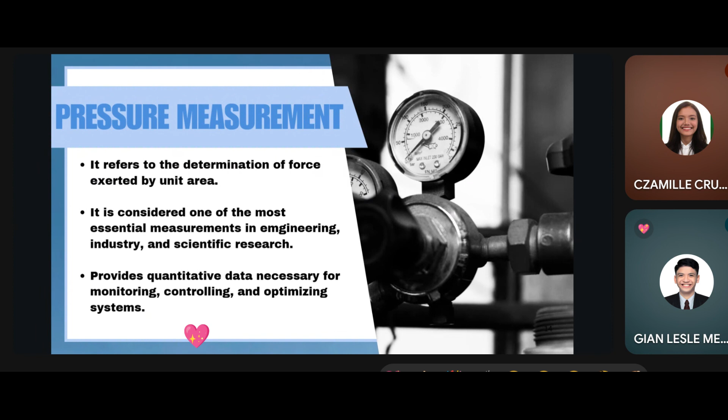So today we're going to talk about pressure measurement. Pressure measurement is one of the most important and widely used measurements in both engineering and everyday applications. It refers to determining the amount of force of a fluid, whether it is a liquid or gas. Just like temperature and flow rate, pressure is a fundamental parameter that must be monitored to ensure safe and efficient operation of systems. By understanding pressure measurement, we can prevent accidents, improve efficiency, and ensure the quality of products and services. That's why it is considered one of the most common and valuable measurements used across the world.

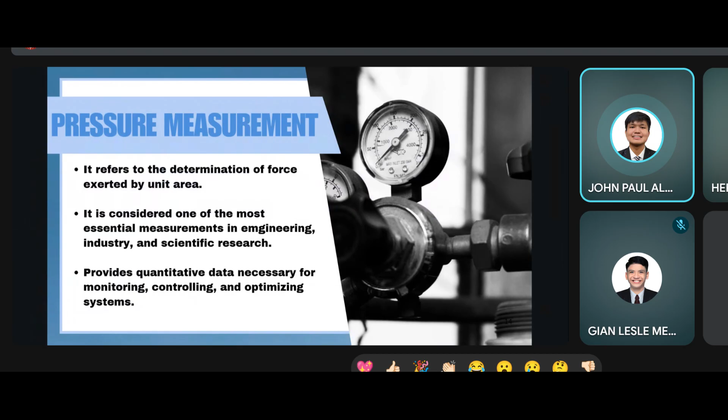Next, we have the core applications of pressure measurement.

We have boiler monitoring, industrial processes, liquid level detection, density estimation, flow rate indication, temperature indication, and everyday application.

Sa boiler monitoring po, pressure measurement ensures boilers operate safely by keeping steam pressure within safe limits. Sa process industries po, continuous pressure monitoring maintains product quality and safety. Sa liquid level detection, pressure readings determine liquid levels in tanks and vessels to prevent overflow or shortage.

Sa density estimation naman po, pressure data can be used to calculate the density of fluids for quality control. Sa flow rate indication, devices like Venturi meters po determine the difference to measure fluid flow. Sa temperature indication naman po, kagaya po ng thermometers, nagre-rely po ito to indicate the temperature.

Sa everyday application naman po, pressure measurement is used daily, kagaya po sa ating mga bahay, sa rice cooker, sa tires, at pati na rin po, ginagamit po ito sa medical equipment for safety.

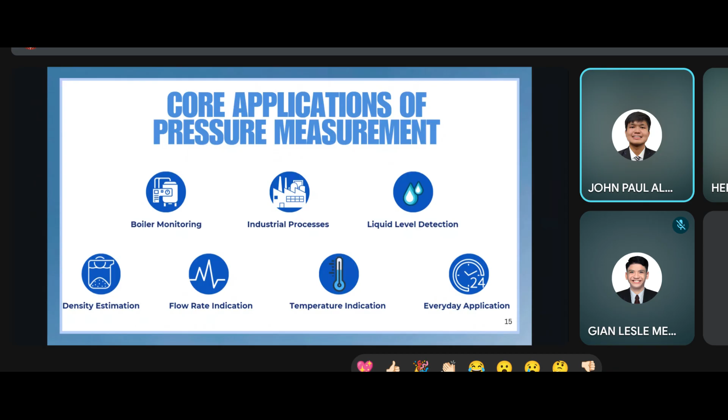Now moving on to the importance of pressure measurement in industrial processes. Pressure monitoring is critical in process industries for several key reasons. The first one is safety. Accurate pressure readings help prevent dangerous pressurization, which could lead to equipment damage, explosions, or the release of harmful substances. Maintaining proper pressure level is essential for protecting both personnel and equipment.

Next one is process control. Pressure is a fundamental variable in many industrial operations. Reliable pressure data allows for precise control of processes such as chemical reactions, fluid transport, and gas compression, ensuring consistent product quality.

The next one is operational efficiency. Managing pressure effectively can improve energy efficiency and reduce waste. For example, maintaining optimal steam pressure in a system can lower energy consumption and operating costs while minimizing environmental impact.

The next one is equipment longevity. Continuous pressure monitoring helps safeguard sensitive machinery like pumps, compressors, and pressure vessels from damage caused by abnormal pressure conditions. This extends equipment life and reduces maintenance expenses.

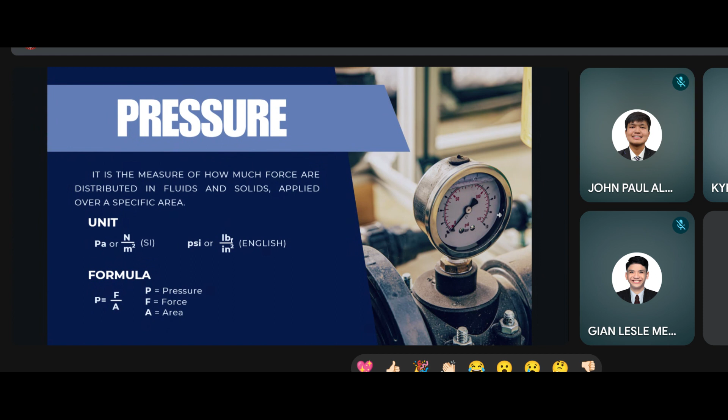So allow me to discuss the type of pressure measurement. So again, sabi nga po ni Engineer Ercilias, pressure is described as the amount of force applied to the surface of an object per unit area. So ang formula nga po din ng pressure is force over area. So pressure measurement is, in principle, always comparing the pressure between two different places.

So siya yung nagiging reference ng mga pressure. So absolute pressure, siya naman yung pwede pong babalikan. Absolute pressure, so yung pressure above the absolute zero. At saka atmospheric, yung pressure ng surroundings at sea level, which is 101.325 kPa. Then vacuum pressure, siya naman yung pressure below atmospheric. At gauge pressure is above atmospheric. At pressure differential naman is the pressure difference in between 2 points.

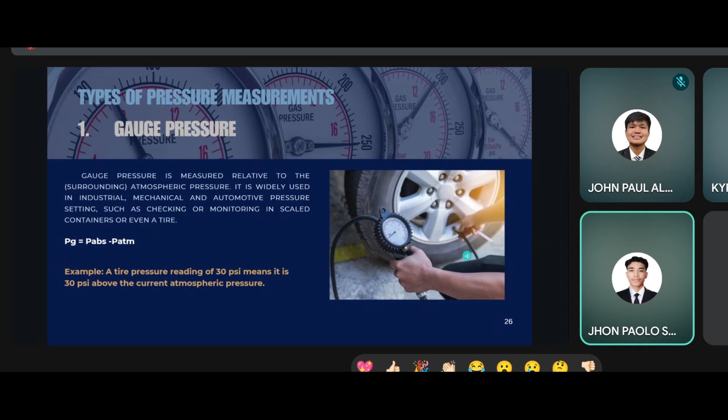So next, we have absolute pressure. This is the pressure measurement in relation to a perfect vacuum, which serves as the zero reference. This point has been chosen because it is the lowest possible pressure. In particular, there is no pressure at all.

As I said, wala sa absolute zero, wala nang pressure. So the pressure above the absolute zero is always positive.

For example, a tire pressure reading of 30 psi means it is 30 psi above the current atmospheric pressure of the surrounding. Hence, it's about 44.7 psi or 308.1107 kPa on the absolute scale.

We got that by adding the atmospheric pressure of the surrounding, which is 14.7 psi or 101.325 kPa, plus the pressure felt by the system, how strong the pressure is inside it, which makes the 30 psi. So we just add the atmospheric pressure to the gauge pressure.

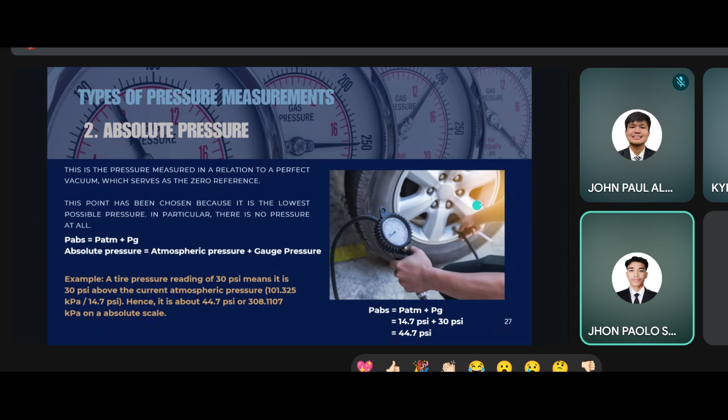So next is differential pressure. Differential pressure is also referred to as pressure difference. This type measures the pressure difference between two points or two random locations within a system.

So why is it important to monitor the pressure difference? Because it serves as a detection method for pressure drops or pressure increases in a component.

For example, the differential pressure value provides information about the difference between the pressure at the inlet and the pressure at the outlet of the tool. It can be a heat exchanger, pump, or filter.

So in differential pressure or pressure difference, you can have a positive or negative value. If the pressure difference is negative, we can speak of pressure loss. If it's positive, that's a pressure increase.

So when there is a pressure drop, that's a possible warning. The possible reason may be a leak, hole, or break in the system. When there is a pressure increase, it may indicate that there is additional resistance in the system, possibly a blockage or debris that built up over time.

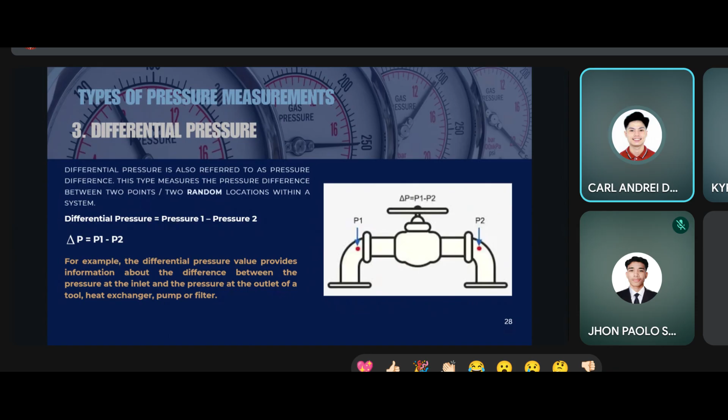And for the remaining types of pressure, we have atmospheric pressure. I believe this isn't new to us since we've long used it in solving pressure-related problems. Basically, this is the pressure exerted by the Earth's atmosphere.

Where is it used? It's most prominent in different types of barometers and also in aircraft flight and lift pumps. Additionally, the most common value used for atmospheric pressure at sea level is 101.325 kilopascal.

Now, let's move on to vacuum pressure. Here, what you need to remember is that any pressure under atmospheric pressure, or with a negative sign, is considered vacuum pressure. It is also expressed as a negative gauge pressure.

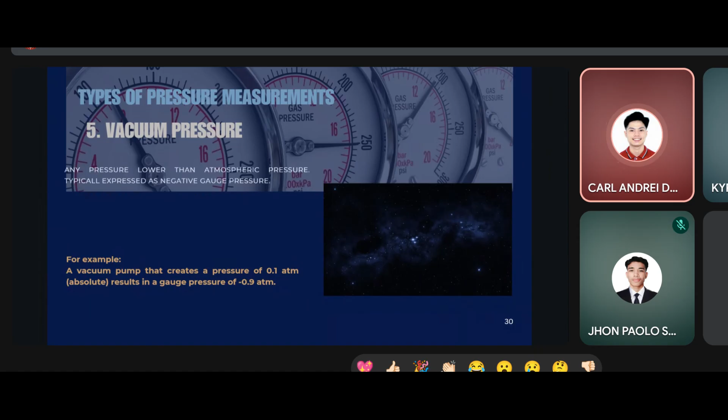And last but not the least, the hydrostatic pressure.

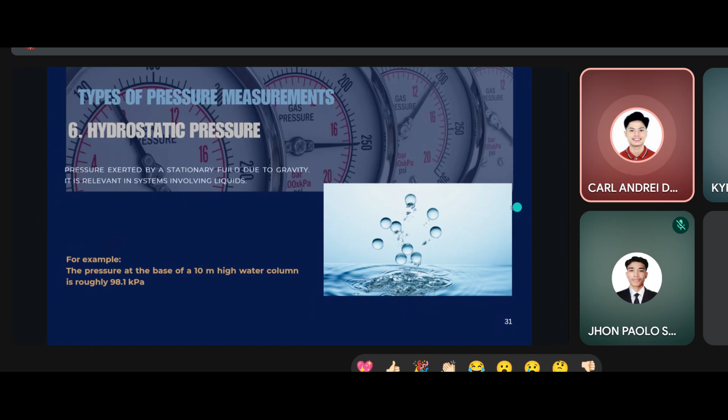Ang una dito ay Pascal. Kung matatandaan niyo naman siya ay si Blaise Pascal na na-discover ng Pascal unit sa pamamagitan ng study of fluids. Base nga sa formula kanina, our pressure is equals to Newton per square meters. Application niya is meteorology, mechanical engineering, syempre sa atin, civil engineering, and technology and electronics. So example niya na makikita natin minsan sa mga sample problem is the vacuum cleaner has a suction power of 25,000 pascals or PA. The pressure in a hydraulic line is 120,000 PA pascals.

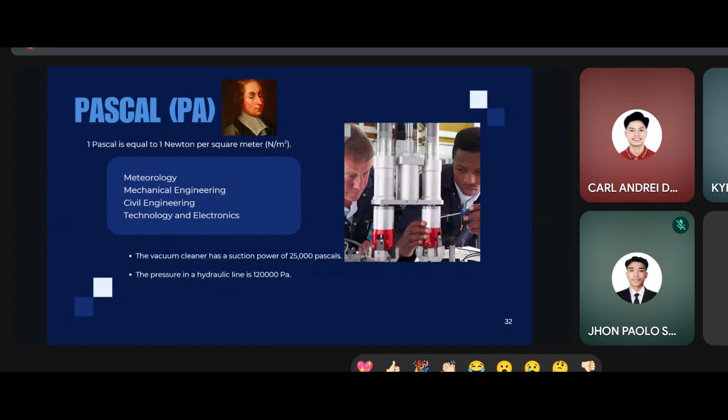Next, kilopascal. Kagaya ng Pascal, syempre, dagdagan lang siya ng kilo. Paano ba natin ginagawang kilopascal ang Pascal? Kung may given tayo na Pascal, dinidivide lang natin siya sa 1,000. Conversion natin, kung may given kayong 12,000 Pascal, multiply nyo lang siya sa kung anong gusto nyong gawing unit. Since gagawin natin siyang kilopascal, 12,000 Pascal times 1 kPa over 1,000 PA.

Ang application niya naman is meteorology, tire pressure, automotive, and fluid dynamics. Since Pascal siya, wide ang kanyang application. Standard atmospheric pressure at sea level is approximately 101.3 kilopascals or kPa. The air compressor operates within a range of 413 to 758 kilopascals.

Tapos ito na ang last na sa conversion, ang megapascal. Since ang pascal natin ay pwedeng lumaki ng value. Like sa thermodynamics, kung mapapansin nyo nung nag-thermo 2 tayo, ang madalas na given sa atin ay MPa kasi ang ating pressure measurements ay palaki nang palaki. Definition dito is 1 megapascal is equals to 1 million pascals. It is common in hydraulic systems and high pressure applications. Para naman ma-convert ang ating PA sa MPa, dinidivide lang natin yung ating pascal sa 1 million para makuha ang ating MPa.

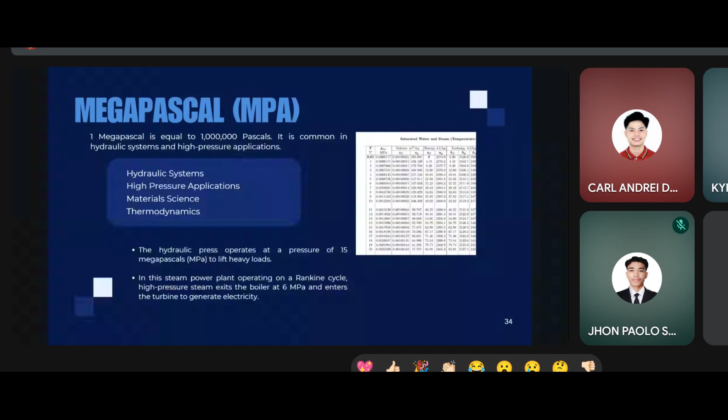Kung meron tayong SI units, hindi naman papatalo dyan ang mga taga-US na may sarili nilang pressure measurement gaya ng pound per square inch, na minsan ay nakapagpahirap sa atin sa pagsasolve. Definition niya is the pressure resulting from a force of 1 pound force applied to an area of 1 square inch, widely used in the United States kasi nga English unit siya. Application niya is tire pressure, hydraulic system, and other industrial applications. Pwedeng ang maging unit nito ay yung LB over inch squared.

Example: the bike tires were inflated to 40 psi. The water pressure at the bottom of the tank is measured to be 45 psi.

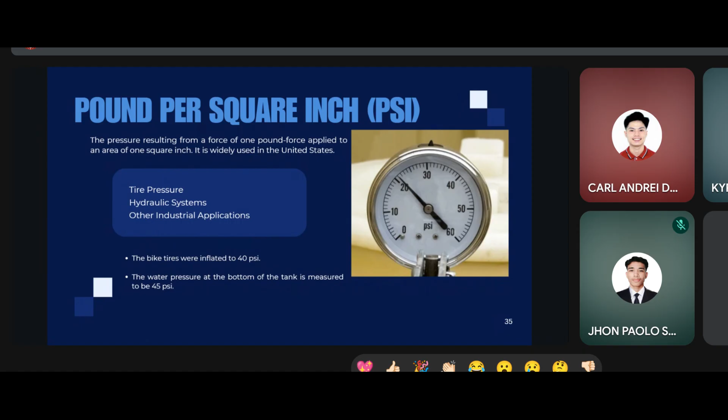Ang pwede naman niyang isa pang unit ay pound per square foot, which is the pressure resulting from a force of 1 pound force applied to an area of 1 square foot, used in structural engineering and wind pressure measurement. Application niya rin ay geotechnical engineering and HVAC systems. Pwede din natin siyang gawing LB over feet squared.

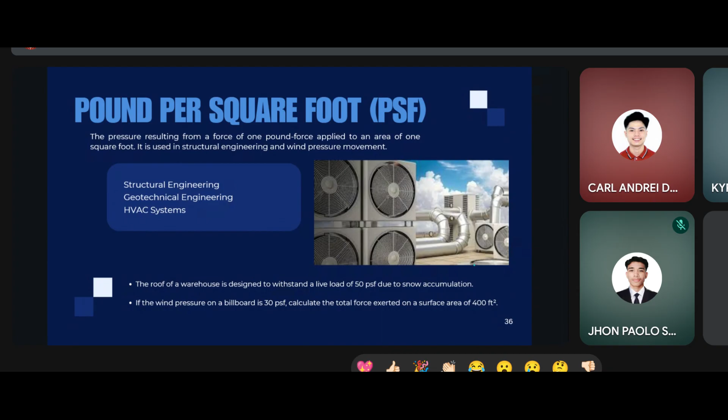The roof of a warehouse is designed to withstand a live load of 50 psf due to snow accumulation. If the wind pressure on a billboard is 30 psf, calculate the total force exerted on a surface area of 400 square feet.

Ito na ang isa pang measurement ng pressure, ang bar. 1 bar is equals to 100,000 pascals, pwede rin siyang 0.1 MPa. The bar is a metric unit of pressure but not part of the SI system, though it is accepted for use. Introduced by Vilhelm Bjerknes, a Norwegian meteorologist, to simplify atmospheric pressure measurements. Siya ay applied sa meteorology, oceanography, automotive application, pressure vessels, and hydraulics and pneumatics.

The pressure inside the container is 5 bar greater than the atmospheric pressure. The hydraulic system operates at a pressure of 120 bar. So yung mga sunod pa pong unit ay i-explain ni Gian.

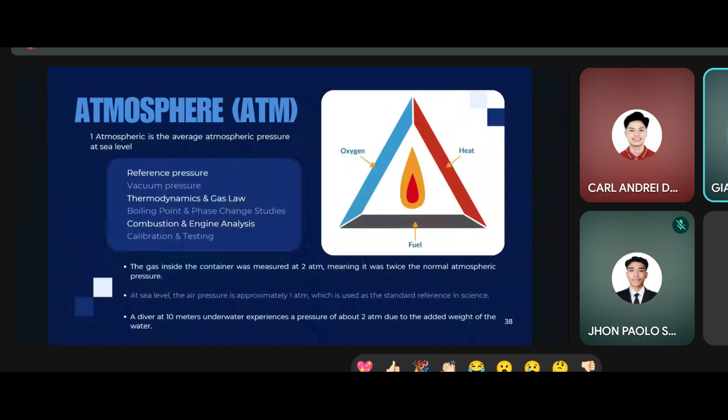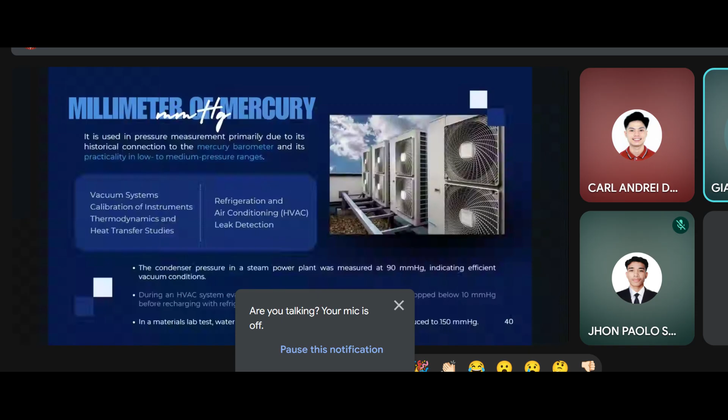Ang siguro hindi tayo medyo familiar, yung refrigeration and air conditioning o yung HVAC. Kasi yun nga, parang prerequisite pa siya. So sa HVAC ay yung mga vacuum levels na ating ginagamit, na gagamitan din natin ng mmHg. And ang mga uses niya ay yung mga examples din sa baba. Nag-originate ang mmHg ay dahil sa mercury barometer at saka practicality in low to medium pressure ranges.

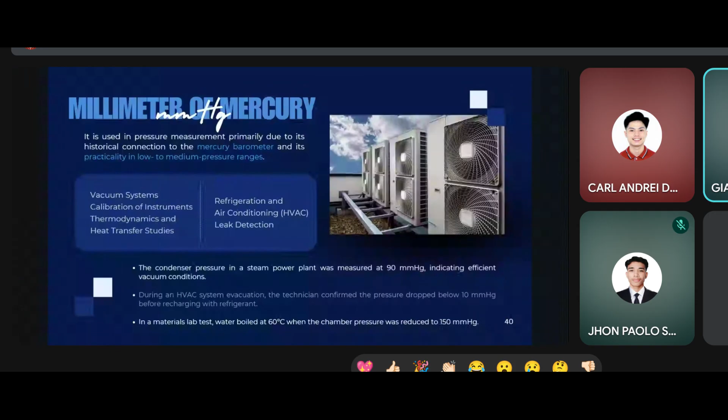And lastly, sa ating unit ng pressure measurement ay ang mbar or millibar. Na-emphasis din sa libro na siya ay used in meteorologies, kasi ang mbar ay invented noong early 20th century by a meteorologist. Kaya siguro yun yung na-emphasis din sa libro natin. And siya ay magagamit din sa mga vacuum technology, refrigeration, turbomachinery, leak testing, and environmental engineering.

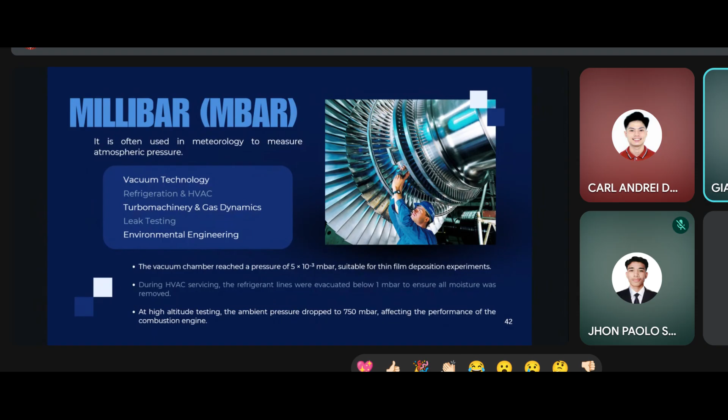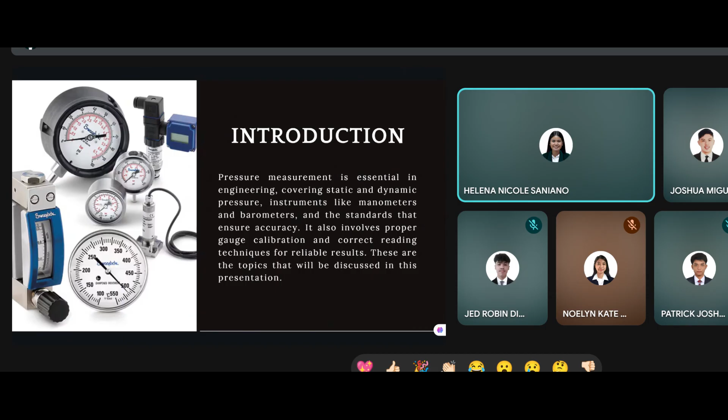Now we're going to discuss static and dynamic pressure. Static pressure is uniform in all directions, so pressure measurements are independent of direction in an immovable static fluid. It doesn't consider the movement in the pressure. Dynamic pressure, with flow taken into consideration, applies additional pressure on surfaces perpendicular to the flow direction while having little impact on surfaces parallel to the flow direction.

We all know static means not moving, while dynamic means it's moving, considering the movement of gases or fluid. Then there's total pressure or stagnation pressure: an instrument facing the flow direction measures the sum of static and dynamic pressures. Since dynamic pressure is referenced to static pressure, it is neither gauge nor absolute — it is a differential pressure.

Now let's proceed to the pressure measuring instruments. The first one is the manometer. A manometer is a device used to measure pressure, typically of gases or liquids, by balancing the pressure against a column of liquid. Manometers are simple, reliable, and widely used in various applications. It is a simple, classic instrument used to measure the pressure of gas or liquid. It works by comparing the pressure of the liquid to a reference pressure, usually having a glass tube inside containing liquid. When there's a pressure difference, the liquid column moves up or down.

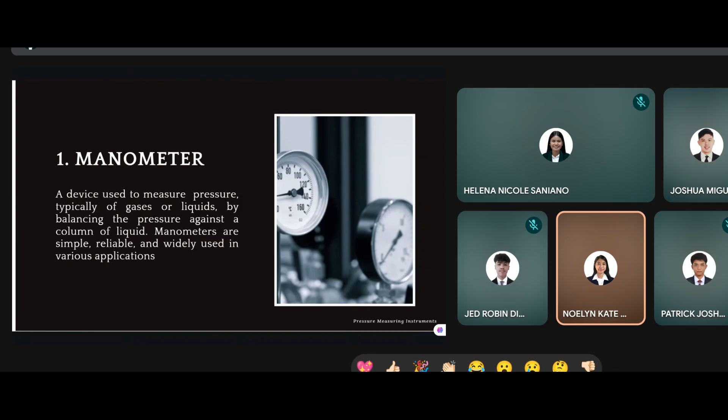Here is the common equation we encountered in thermodynamics and fluid mechanics: P equals rho GH, where P is the differential pressure, P1 is the low pressure, P2 is the high pressure, rho is the density, G is the acceleration due to gravity, and H is the height.

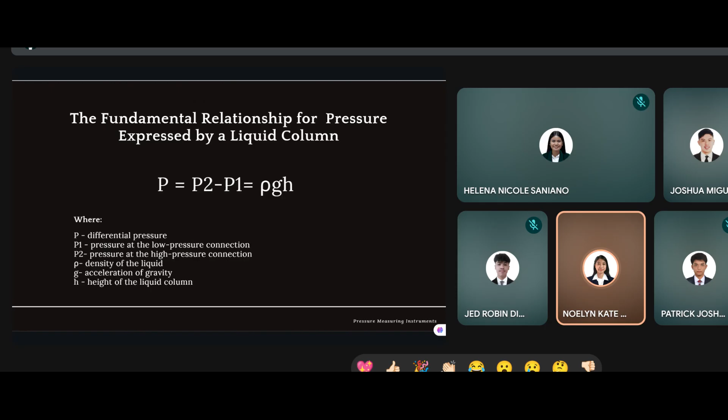We have different types of manometers. First is the U-tube manometer, consisting of a U-tube glass filled with liquid, usually mercury or water. It is used to measure small pressure differences such as in laboratory experiments or ventilation. The U-tube manometer is basically a glass tube shaped like the letter U with liquid inside. One side is connected to the pressure source, while the other side is open to the atmosphere or reference. When there's a pressure difference, the liquid level becomes uneven on the two sides, and that's the basis for reading. It's easy to use for small pressure differences like lab experiments or ventilation systems.

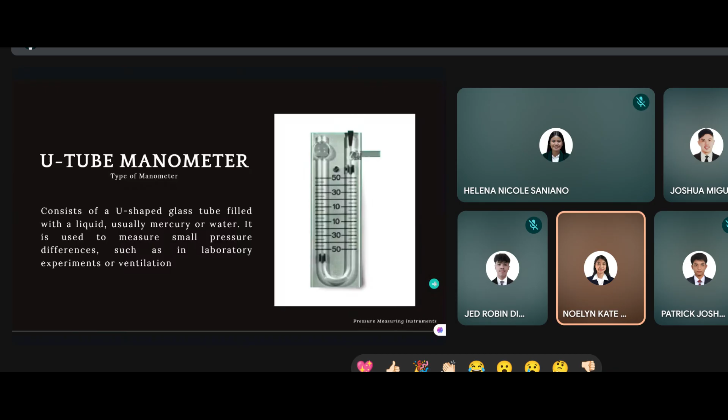Next is the inclined manometer, a specialized type designed to measure small pressure differences with greater accuracy and sensitivity than standard U-tube manometers. It has almost the same concept as the U-tube, but the tube is tilted. Because it's inclined, the movement of the liquid column is longer for the same pressure change, making it more sensitive and accurate for very small pressure differences. The formula used involves the angle, since it's tilted — we use rho GH times sin theta.

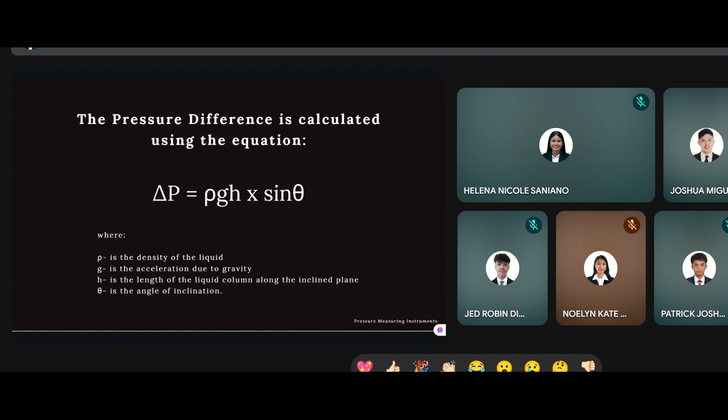Another type of manometer is the well-type manometer. It is a variant of the traditional U-tube manometer, designed to measure pressure with enhanced readability and convenience, especially for larger pressure ranges. It is used both in industrial settings and laboratories due to its ability to provide clear and accurate pressure readings. It uses a large reservoir, or well, on one side of the tube, which helps stabilize the liquid level, making the measurement process easier and more readable. The well-type manometer is basically a more advanced version of the U-tube manometer — its U-shaped tube is partially filled with liquid, usually water or mercury, while one side remains open to the atmosphere. It's mainly used for lab experiments, working by changes in the liquid level inside the tube.

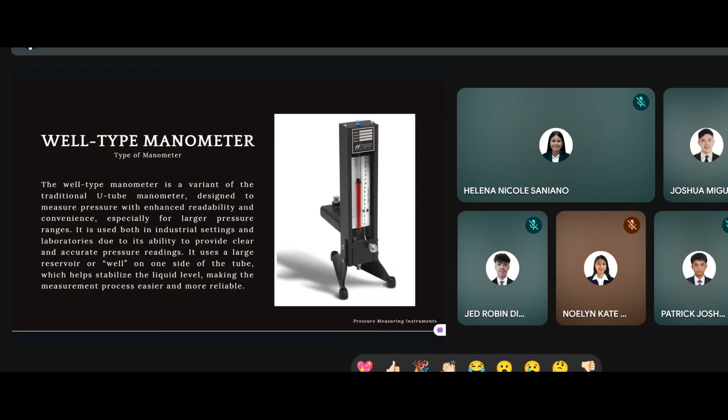Next po is the digital manometer. Digital manometers do not rely on a hydrostatic balance of fluids, unlike the manometers stated earlier. In order to detect pressure, they have a component called pressure transducer that converts the level of pressure observed into an electric signal or value.

So the digital manometer, as the name states, is digital, it uses electronics para gumana. Then ang nagde-detect nung pressure sa kanya is yung mga electronic sensors, yung pressure transducers.

Kaya siya ginagamit is mas mabilis or accurate yung measurement ng gauge or differential or absolute pressure sa both static or dynamic systems. Maganda din siya dahil isa sa mga portable na manometer, then fast yung measurements.

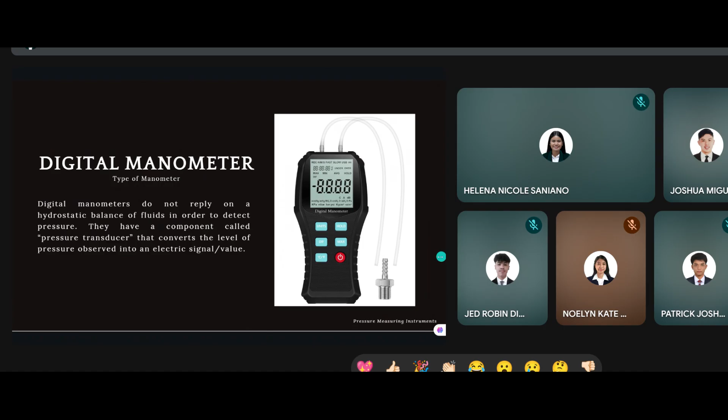The next type of pressure measuring tool is the Bourdon tube. It is most widely used as a pressure sensing element. It is a mechanical pressure measuring device that uses a curved metal tube which straightens slightly when internal pressure increases. This movement drives a pointer on a dial to show the pressure. It is commonly used in industrial gauges due to its simplicity and readability, but is less effective for low pressure measurements. So ang Bourdon tube, nag-work siya.

May curved metal tube po siya na nagsistraighten kapag may na-apply na pressure. Tapos yung mechanism niya, yung mismong dial is nagta-turn kapag nakakaramdam ng pressure. Kumbaga po, parang same concept din siya ng weighing scale. Parang ganun po yung dating niya. Mas maganda po siya gamitin kapag high yung pressure ng ating sinusukat. Ginagamit po siya, majority is sa industrial or sa mga mechanical systems.

The third one is the diaphragm pressure gauge. It is used to measure pressure in environments where the fluid is corrosive, high temperature, thick, or contains solid particles that could damage traditional gauges. The gauge consists of a diaphragm isolator and a general pressure gauge. The diaphragm isolator prevents the fluid from coming into contact with the internal parts of the gauge.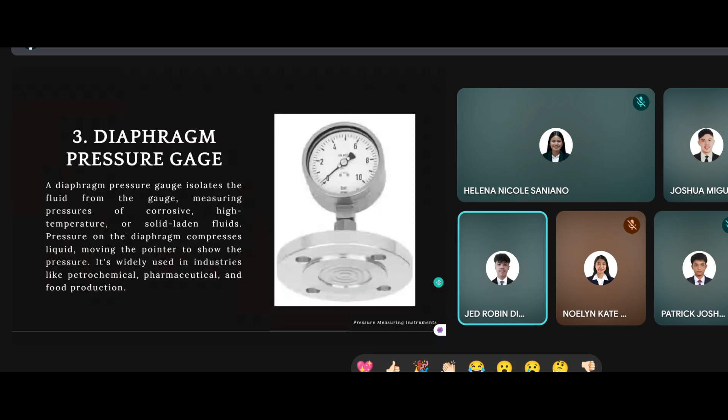Bellows pressure gauge works by using a flexible metal bellows that expand or contract based on pressure changes. This movement is transferred mechanically to a pointer on the dial, giving the pressure reading. These gauges are ideal for low pressure measurements and are valued for their high accuracy in applications like laboratories where precise measurements are needed. Thanks to their sensitivity, bellows gauges are perfect for systems where small pressure changes must be detected and monitored, like in scientific research or precision equipment.

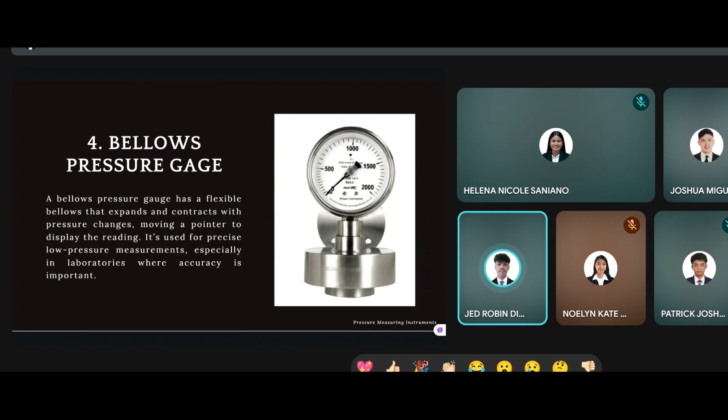Next slide is McLeod vacuum gauge. It is specifically used to measure low vacuum pressures and is often used to calibrate other vacuum gauges. It works by compressing a known volume of gas. The gauge contains a bulb, capillary tubes, a reference column, and a mercury reservoir that is controlled by a piston. Pressure is calculated using Boyle's law, P1V1 equals P2V2, where P1 and V1 are the initial pressure and volume, and P2 and V2 are the final pressure and volume.

The McLeod gauge is modeled for measuring gases that follow Boyle's law, but it's not suitable for vapors or gases that do not obey this law. It is often used in precision vacuum measurements and calibration.

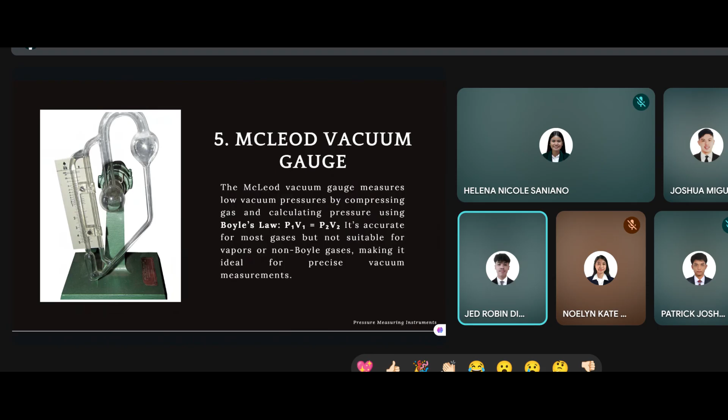Next naman po ay Pirani gauge. The Pirani gauge consists of a metal wire open to the pressure being measured. The wire is heated by a current flowing through it and cooled by the gas surrounding it. Sa Pirani gauge po, ginagamit po ito para i-measure yung low pressure sa vacuum system. It doesn't measure the pressure directly, instead it works by checking how gas conducts heat.

Inside the gauge, there is a thin heated wire. If there are many gas molecules, they carry away the heat quickly, meaning it's higher pressure. If there are few molecules, the wire will stay hot, meaning it's lower pressure. So simply, the Pirani gauge measures the pressure by how fast gas can cool a hot wire.

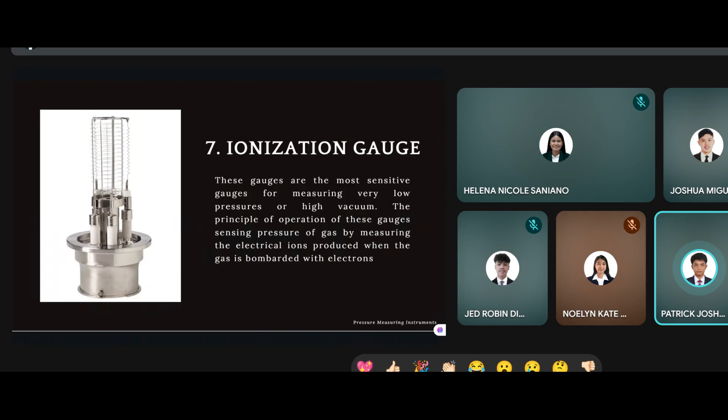So ang number ng ions po ay depende sa dami ng gas molecules. If there are more molecules po or higher pressure, more ions are formed. And if konti lang naman po yung molecules, konti din po yung ions na napo-form. So overall po dito sa ionization gauge, it measures pressure by counting how many ions are made from the gas molecules. So next po,

Thermal conductivity vacuum gauge. The thermal conductivity vacuum gauge works on the principle that at low pressure, the thermal conductivity of a gas is a function of pressure.

So this gauge naman po measures low pressure by using the principle of heat transfer. So inside this gauge po, there is a heated element like wire or filament. The cooling of this element depends on how many gas molecules are around it.

So at higher pressure po, mas madami po yung gas molecules, so they carry away more heat po. At lower pressure naman po, mas kokonti po yung gas molecules, so the wire stays hotter po. So the thermal conductivity gauge measures pressure by checking how fast gas removes heat from a hot wire po.

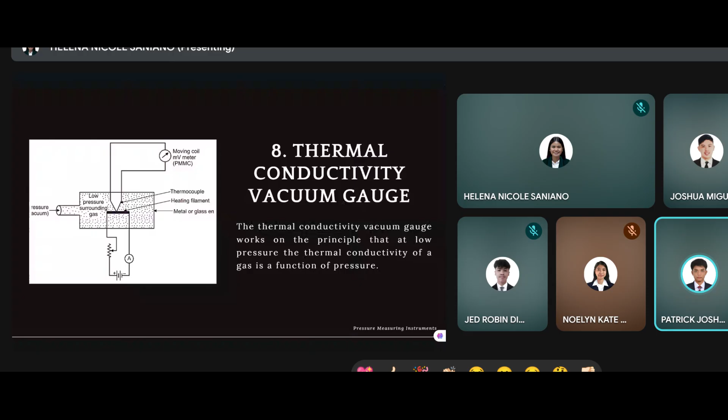For the dead weight tester po, a dead weight tester is a primary standard for pressure calibration. It is used to check instruments like gauges, transducers, and sensors. By applying known weight on a piston, it produces a reference pressure. It works on the simple

area. Paggamit po ng dead weight tester, ito po ang pinagsusukat po natin ng mga pressure gauges na ginamit po sa iba't ibang machine.

Dito po, nilalagay na yung weight po ay nag-transfer sa fluids, binubuksan na valve, which then, pag nabuksan po yung valves, yung fluid na sinusukat po para i-calibrate po yung pressure gauges.

Mainly po, or usually po, nakaset po siya sa isang pressure. So, once na magte-testing po kayo, most likely po ay pare-pareho po dapat ang pressure na masusukat. Next po.

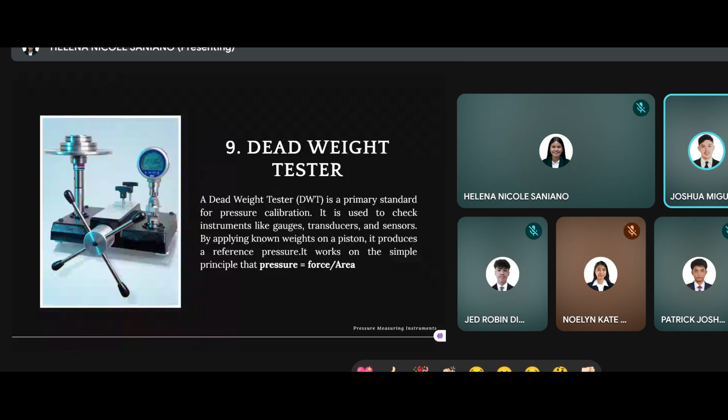Strain gauge pressure transducer. It is a fine wire whose resistance changes when strained. When attached to a diaphragm, it stretches or compresses as the diaphragm flexes under pressure. This deformation alters its length and cross-sectional area, causing a change in resistance, calculated based on its resistance.

R4 is equal to R2 times R3 over R1. Ito po ay madalas po siyang nakakabit po sa mga bridges, dams and power plants para po ma-check ang overloading niya. Under tension po, resistance increases, and under compression, resistance decreases. Next po.

Capacitive pressure transducer. A capacitive pressure transducer senses pressure through variations in capacitance. Pressure deforms a diaphragm between two plates. The plate spacing shifts, causing a change in capacitance.

Sa capacitive pressure transducer po, meron po siyang dalawang plato, isang naka-fix at isang diaphragm. Kapag may pressure po na gumalaw sa diaphragm, mas lumalapit po siya or lumalayo sa fix na plato, sa isa pong fix na part.

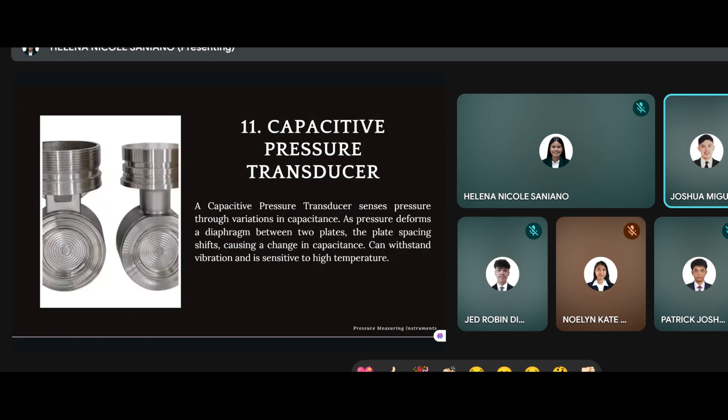The next one is the potentiometric pressure sensors. A potentiometric pressure sensor is a type of sensor that measures pressure by converting the mechanical displacement of a diaphragm or wiper into a change in electrical resistance.

Ito naman po ay nagwo-work by converting mechanical pressure into an electrical signal gamit ang potentiometer or variable resistor. Dito naman ay kapag may pressure na naka-apply ay nagkakaroon ng movement sa sensing element at nagbabago ang resistance. Kaya sa pagbabago ng resistance ay nagbabago rin ang output voltage na nagre-represent ng pressure.

Commonly ay ginagamit ito sa industrial machine, hydraulic systems at automotive application para ma-direct measurement ng displacement or pressure. Next po.

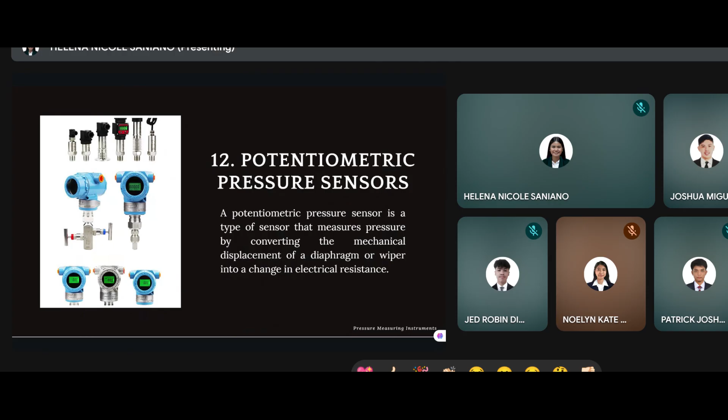Next is the inductive pressure transducer. It works by using the principle of inductance, where the electrical inductance of a coil is affected by the position of a movable core or diaphragm that changes in response to pressure. When pressure is applied, there is displacement or movement in the diaphragm or core of the sensor. This movement changes the inductance of the coil, and that change is converted into an electrical signal proportional to the pressure. Its advantages are high accuracy, good sensitivity, and durability, which is why it's commonly used in industrial applications, aerospace, and automotive systems.

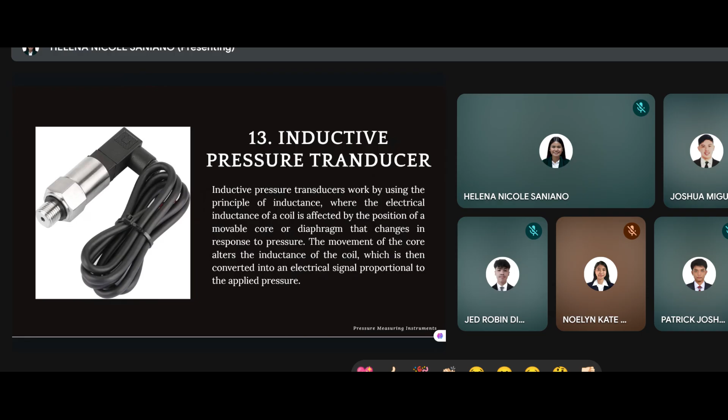Next is the barometer, an instrument used to measure atmospheric pressure, which is essential for weather forecasting, altitude determination, and various scientific applications. The barometer has been a fundamental tool in meteorology since its invention in the 17th century by Evangelista Torricelli. It is commonly used to predict the weather. When pressure is high, it usually means good weather, but when it's low, it usually means rain or a storm is coming. The common type is the mercury barometer, where the mercury level rises or falls depending on air pressure, while the aneroid barometer uses a metal capsule that expands or compresses with changes in pressure. It is simple but very useful, and is used not just in meteorology but also in aviation and navigation to help ensure safe and accurate operation.

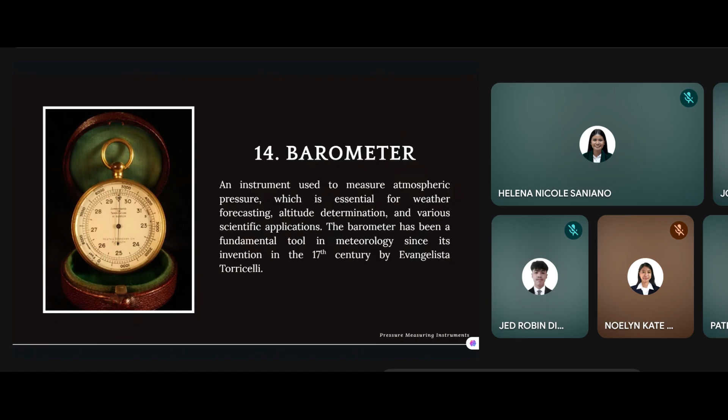For standards, the American Society of Mechanical Engineers has developed two separate and distinct standards on pressure measurement: B40.100 and PTC 19.2. B40.100 focuses more on guidelines for pressure gauges, including dial type, digital gauges, diaphragm seals, and pressure limiter valves. Meanwhile, PTC 19.2 focuses on the accurate determination of pressure values for performance testing. Basically, it helps ensure the correct method, instrument choice, setup, and corrections are used depending on the purpose of the measurement and required accuracy. The goal of these standards is to make pressure measurement methods consistent and reliable across the industry.

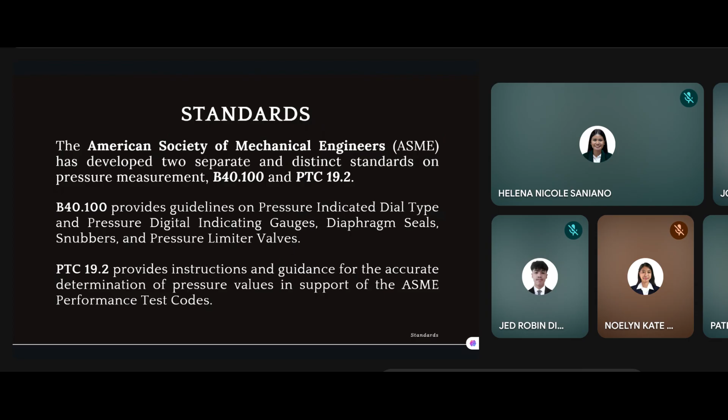Now let's move on to the calibration of a pressure gauge.

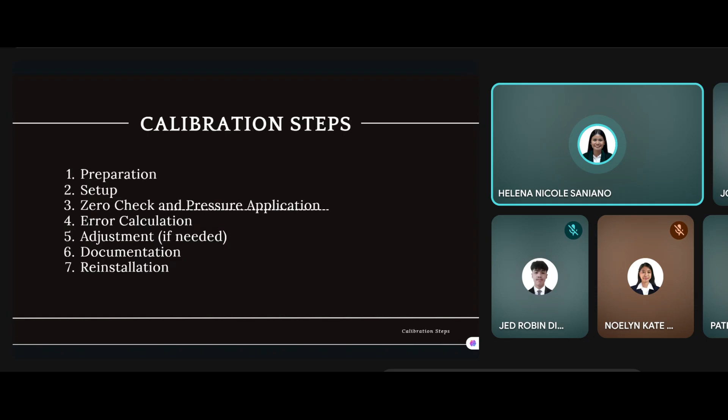We have 7 steps in the calibration of a pressure gauge. First is preparation, second is setup, third is zero check and pressure application, fourth is error calculation, fifth is adjustment if needed, sixth is documentation, and seventh is reinstallation.

First is preparation. The first step is to select the gauge and gather tools, preparing all the materials and instruments needed before calibration. Next, you need to log readings in a notepad, sheet, or software, to record consistency and inconsistency while calibrating.

Third is to ensure safety by wearing appropriate PPE. In everything you do inside the laboratory, or every time you calibrate something, you need to wear the proper gear, especially gloves and goggles, or full PPE if needed.

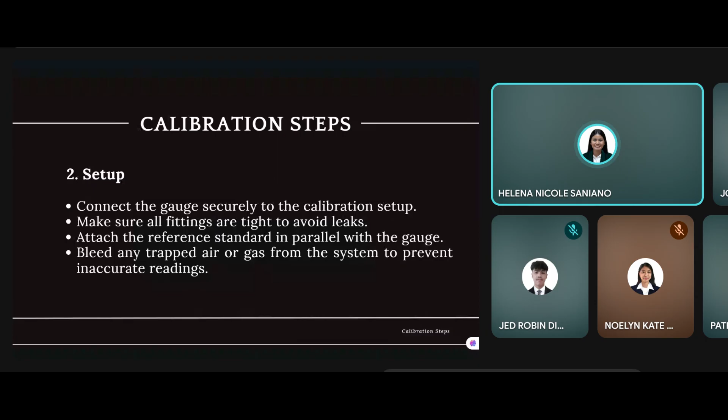Next is the zero check pressure application. This is connected with checking if may laman pang gas or air yung system or yung pressure gauge at kung may leakage. So check if the gauge needle rests at zero when unpressurized, meaning pag unpressurized, wala pang pressure na inia-apply. So with that, kailangan stable or nasa zero yung arrow, nakatapat sa zero.

Kung sure naman na kayo na walang laman or walang natirang gas or air sa loob ng system, tapos yung arrow ay hindi sa zero nakatapat, maybe you can adjust it to zero to make sure na yung lalabas na readings ay accurate. Next is to gradually apply pressure in steps.

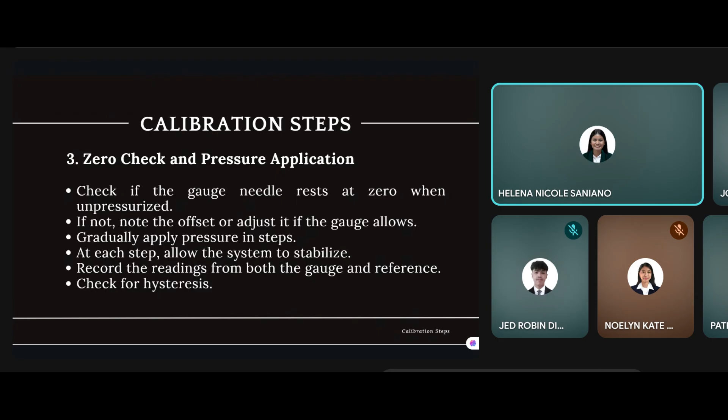So merong specific amount of pressure every step of the way in order to record or to know kung accurate pa rin ba yung pressure gauge sa mga readings niya. So you need to record the readings from each step sa gauge at saka sa reference para makita nyo yung difference kung at the end of the process ay accurate pa rin ba yung nalabas na readings dun sa pressure gauge. And next is to check for hysteresis.

Before moving on to the next one, ito na po yung error calculation. Like what I've said, you need to write all the readings at every step or every amount ng pressure na i-add. Since at each pressure level, you need to compare the gauge reading with the reference standard and calculate the deviation. So meron kasing standard na dun sa gauge pressure. At kapag kinalibrate mo siya, mapagko-compare mo kung mataas ba yung difference between the standard and dun sa gamit mong paraphernalia. Kasi kapag malaki na yung difference niya, ibig sabihin inaccurate na or meron ng inconsistency sa magiging readings or records mo in the future.

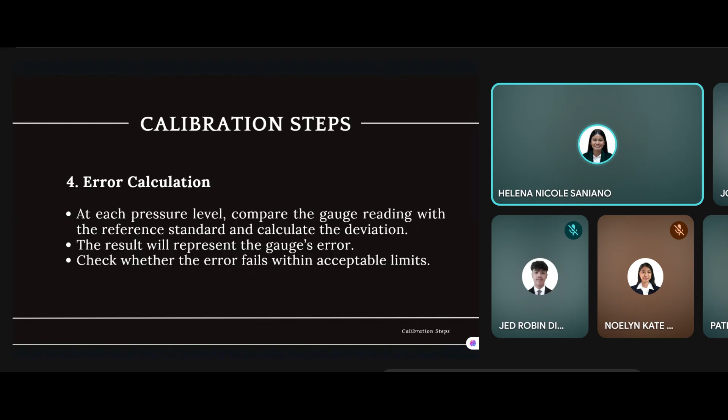So the result will represent the gauge error. Like what I've said, kapag mataas yung difference or mataas yung error na lumabas, ibig sabihin may inconsistency na, hindi na accurate yung paraphernalia to use in the future. So check whether the error falls within acceptable limits. Meron lang certain limit para malaman mo kung accurate pa ba yung pressure gauge. For example, kapag maliit lang naman yung error na makakalculate mo, maliit lang yung inconsistency or malapit pa rin naman doon sa standard. Pero kapag sobrang layo na niya dun sa standard amount is the standard measurement, ibig sabihin hindi na accurate gamitin yung pressure gauge.

Next is adjustment if needed. If the gauge is adjustable and the error exceeds acceptable limits, make corrections usually via screw or knob. So there's a chance or probability na kapag mayroong slight difference between the standard and on what you calculated or measured, meron lang siguro luwag na screw or siguro meron ngang leakage. Yun yung mahalaga kung bakit kailangan mong tingnan kung may leakage ba dun sa mga magkakakonect na pipes. Also kung maskip ba yung mga pagkakakabit ng screws, kung meron bang maluwag, kasi pwede rin magkaroon doon ng leakage. So kung hindi mo siya na-double check before mo gamitin yung calibration setup at saka yung pressure gauge, ibig sabihin may chance nga na magkakaroon ng error sa dulo.

Next is after adjustments, repeat the calibration to confirm accuracy. So after mong ma-confirm kung ayos nga ba yung mga screw, kung wala nga ba talagang leakage, pwede mong ulitin yung calibration process. If ever na ganun pa rin yung lumabas na result, kapag meron pa rin error or malaki pa rin yung difference, ibig sabihin tama yung ginawa mong calibration process, pero yung pressure gauge na mismo yung may mali. Ibig sabihin kailangan na siyang palitan.

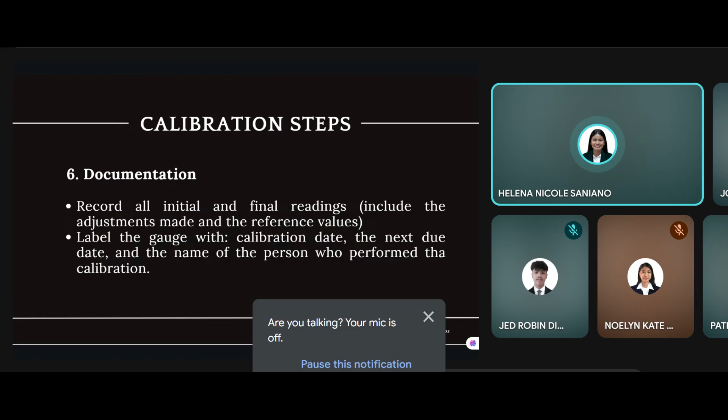Last - I don't think this is the last one. So documentation. You need to record all initial and final readings, include the adjustments made and the reference values. Like what I've said, you need to take down notes every step of the way, every level. I-compare mo siya sa initial, and then kung magkakaroon ng adjustment, you will take down notes as well. And then you will compare it na sa final readings. You will see if the same lang ba from the start to finish, kung mayroong slight adjustment, kung mayroong slight difference after the adjustment, and so on and so forth.

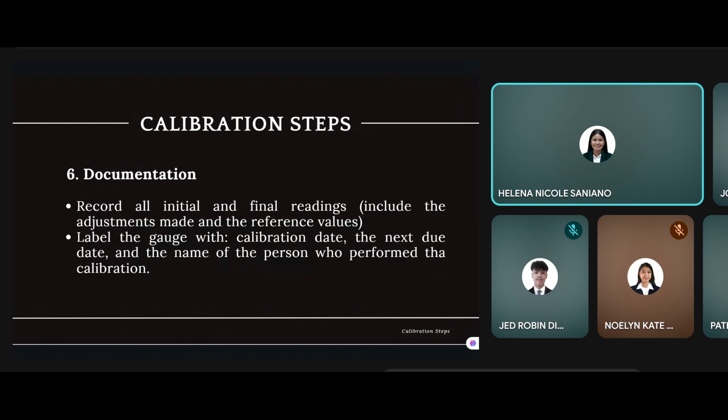You need to label the gauge with calibration date, the next due date, and the name of the person who performed the calibration. Kailangan ng maintenance para malaman mo kung hanggang kailan pa ba pwedeng gamitin yung pressure gauge.

Hindi pwedeng once a year mo lang siya i-check kasi malay mo nagkaroon siya ng defect through different possible effects. So for example, nag-calibrate ka this month, you will log down kung kailan siya ulit ika-calibrate, and make sure na yung mga laboratory personnel ay na-inform mo na nag-calibrate ka, at sasabihin mo sa kanila kung kailan yung next due date o deadline na ika-calibrate ulit yung paraphernalia. In that way, ma-ensure nyo na na-maintain at accurate yung readings niya kapag ginamit sa laboratory.

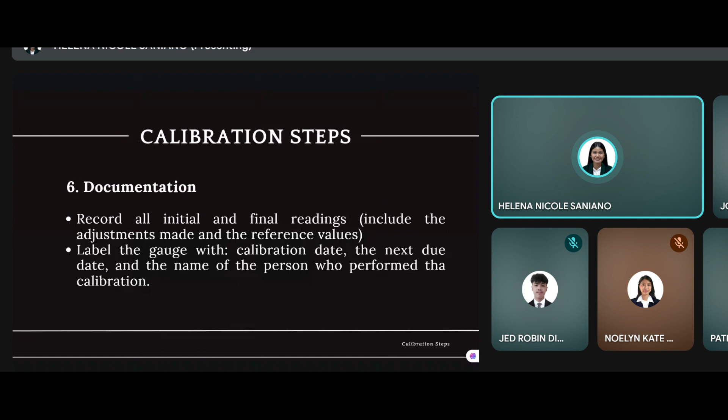So next one is the reinstallation. Syempre, after the calibration process, after nyo makalibrate yung pressure gauge, kailangan mo siyang ibalik dun sa setup niya before mo siya kalasin. Ibabalik mo ulit siya sa system, at itatry mo kung gumagana ba siya the same way na gumagana siya before.

Before this, let me present a video to everyone.

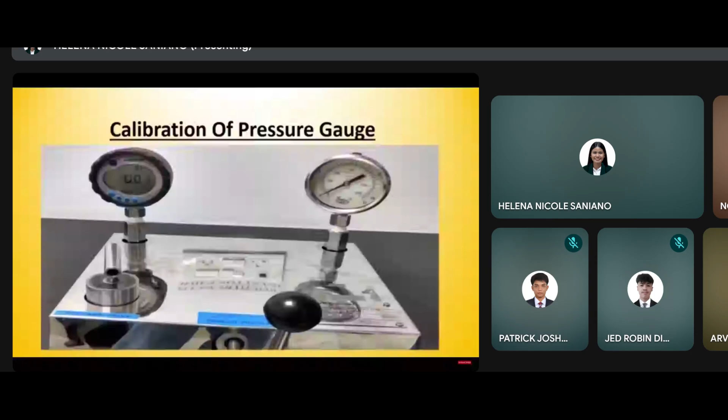Hi friends, welcome to our channel. Today we will demonstrate how to calibrate a pressure gauge in calibration laboratory using comparison method.

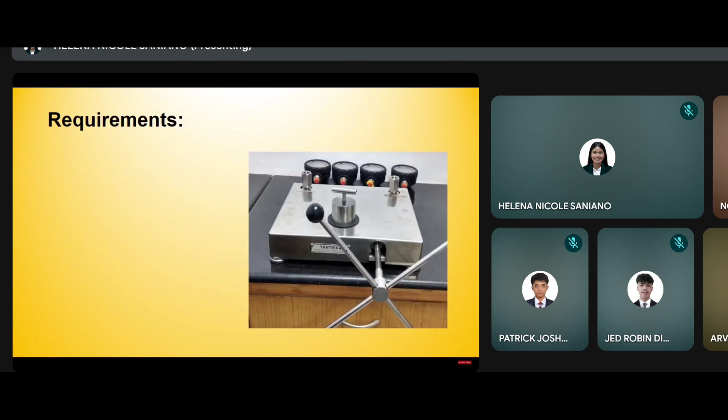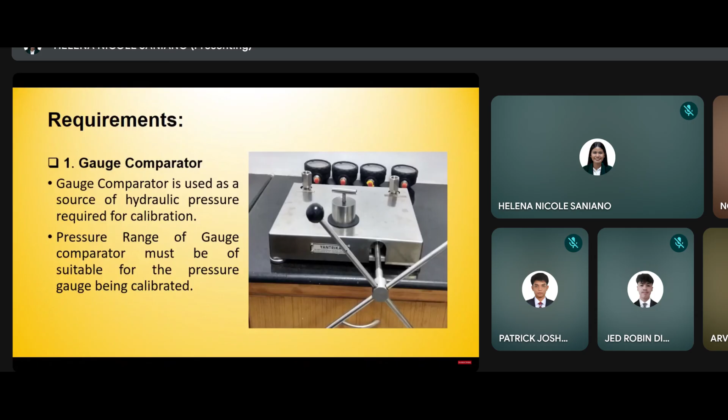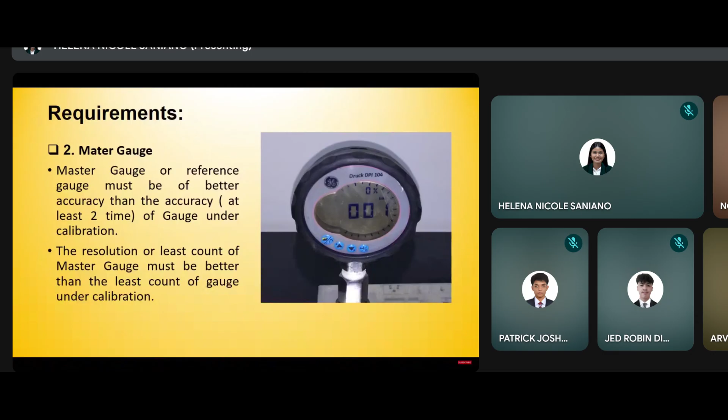Before starting, let us discuss what equipments we need to calibrate a pressure gauge. The first equipment we need is gauge comparator, used as source of hydraulic pressure required for calibration. Please note that the gauge comparator should be able to provide sufficient full-scale and linear pressure to the unit under calibration. Our second requirement is master pressure gauge, also known as reference gauge. It is the most important equipment in any calibration - master gauge of better accuracy will give more accurate calibration results. The resolution or least count of master gauge must be better than the least count of gauge under calibration. Third and final requirement is the pressure gauge being calibrated, also called unit under calibration or UUC. The UUC must be in good working condition. Both master gauge and gauge under calibration must be kept in controlled environment for at least 2 hours.

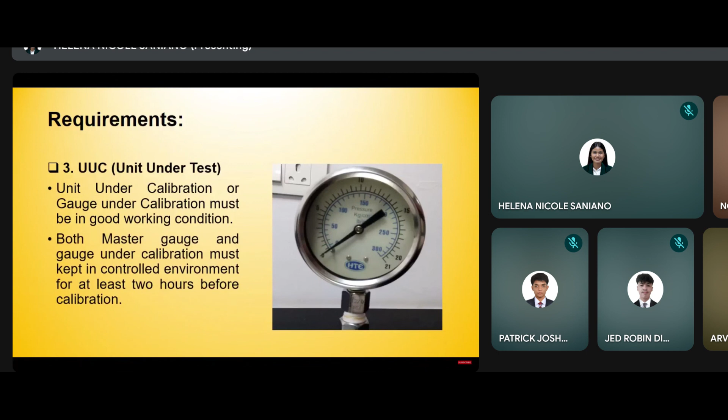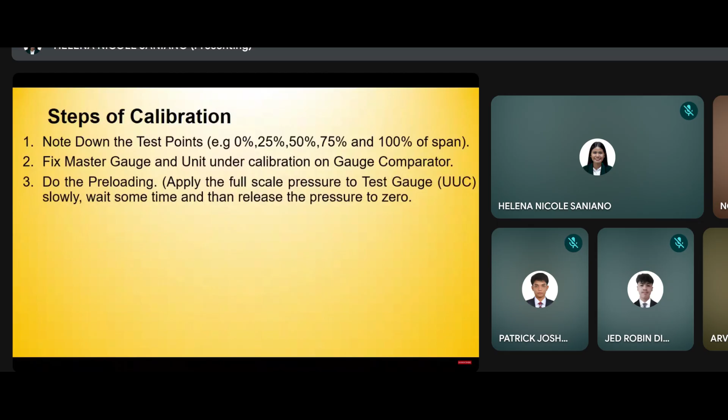Let us discuss the steps of calibration. Step 1: Note down the calibration points. Step 2: Fix the master gauge and test gauge on the gauge comparator. Step 3: Do the preloading. Step 4: Apply the pressure and note the readings of master and test gauge on each calibration point in both increasing and decreasing cycles. At least 30 seconds should be waited before taking observations on test points in order to stabilize the pressure. Step 5: Calculate the measurement uncertainty and final results based on the observations.